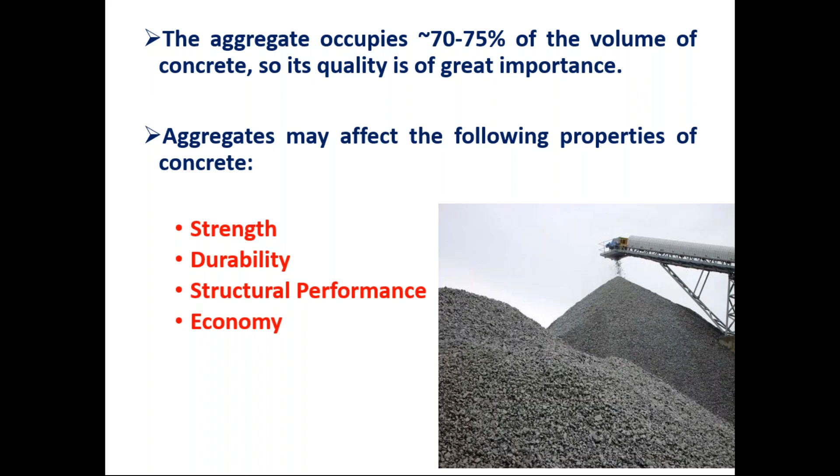So as I was discussing, the aggregates affect various properties of concrete including strength of the concrete, durability of the concrete, and its structural performance and economy, because ultimately the aggregate decides the economy of the concrete mix. Of course, one important thing I'm going to discuss is also the workability of the concrete - workability in the fresh stage and all other things in the hardened stage.

Aggregates have three main functions in concrete: to provide mass particles which are suitable to resist the action of applied loads and show better durability than the cement paste alone; to provide a relatively cheap filler for the cement material; and to reduce volume changes resulting from the setting and hardening process and for moisture changes during drying.

The last one is equally important because the cement paste undergoes considerable shrinkage. If you add aggregates to the cement paste, it helps in reducing the volume changes which happen from the setting and hardening process. The moisture changes during drying also result in shrinkage, and aggregates are very good in preventing shrinkage. So aggregates have all these important functions to perform in concrete.

The properties of concrete are affected by the properties of aggregates. That means we need to understand the properties of aggregates very well - we need to test the aggregates before we use them in concrete. The mineral character of aggregate affects the strength, durability, and elasticity of concrete - how strong the aggregate is. The mineralogy, the mineral composition, helps the aggregate in the concrete achieve the required strength.

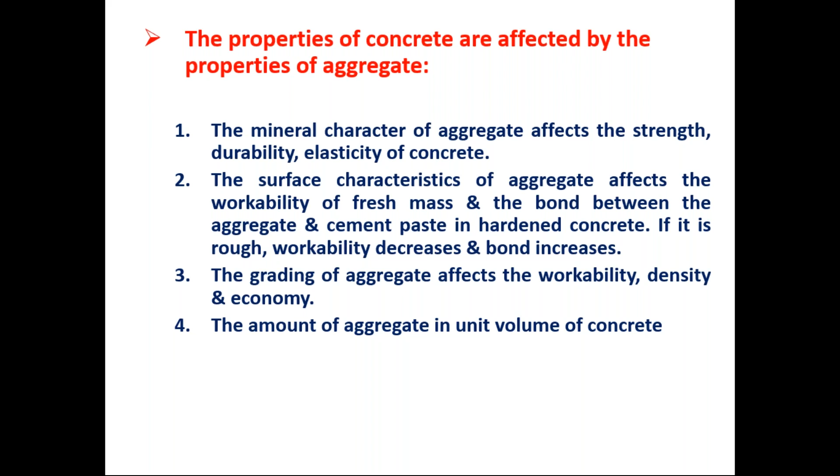Then the grading of aggregates affects the workability, density, and economy. This is the most important aspect of aggregates - the gradation. We need to check the gradation of aggregates whenever we want to propose aggregate from a particular source. The amount of aggregate in the volume of concrete also matters - how much aggregate is present in one unit or 1 cubic meter of concrete. So all these four factors affect the properties of concrete in a big way.

However, all aggregates are not inert. We normally assume aggregates are inert materials, but some aggregates exhibit physical action such as swelling and shrinkage, seen in lightweight aggregates and similar materials. Chemical action is another important factor, since some reactive silica present in aggregates reacts with alkalis in cement, causing alkali-silica reaction. So physical action, chemical action, and thermal action are three important properties to understand, since some aggregates are expansive or show contraction, though not normal aggregates.

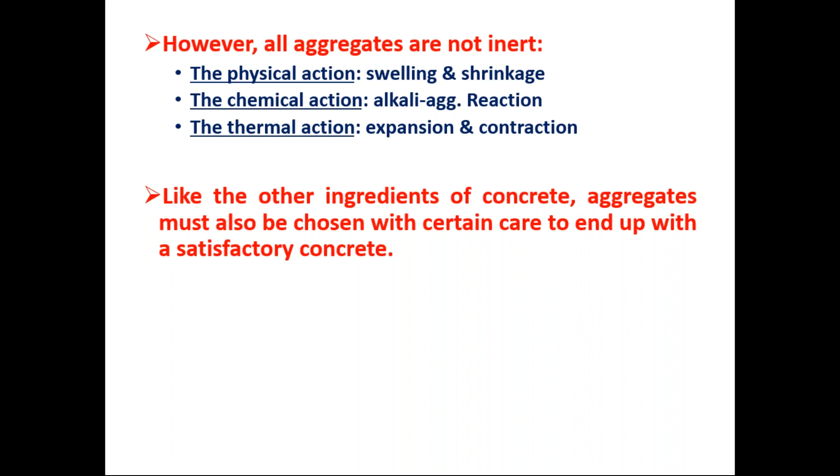Like other ingredients of concrete, aggregates must be chosen with care to produce satisfactory concrete. So let us look into various classification methods for aggregates.

According to source, aggregates can be classified as natural or artificial. Natural aggregates may be deposits with no change in their natural state other than washing, crushing, and grading - they remain the same naturally available material. This can be sand, gravel, or crushed stone from stone crushers.

Artificial aggregates are obtained either as a byproduct or by a special manufacturing process such as heating. Classic examples are blast furnace slag, which can be used as both fine and coarse aggregate, and expanded perlite, which comes as a byproduct from heating.

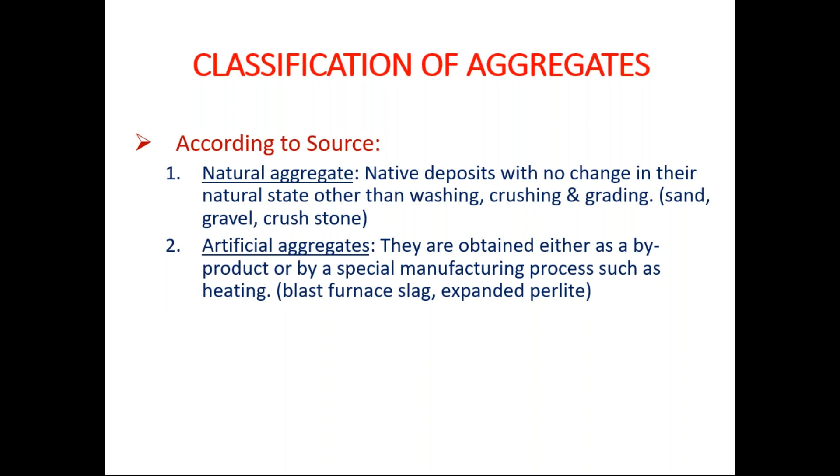Another classification is petrological classification. According to origin, aggregates may be of igneous rock origin, sedimentary rock origin, or metamorphic rock origin. This classification is equally important.

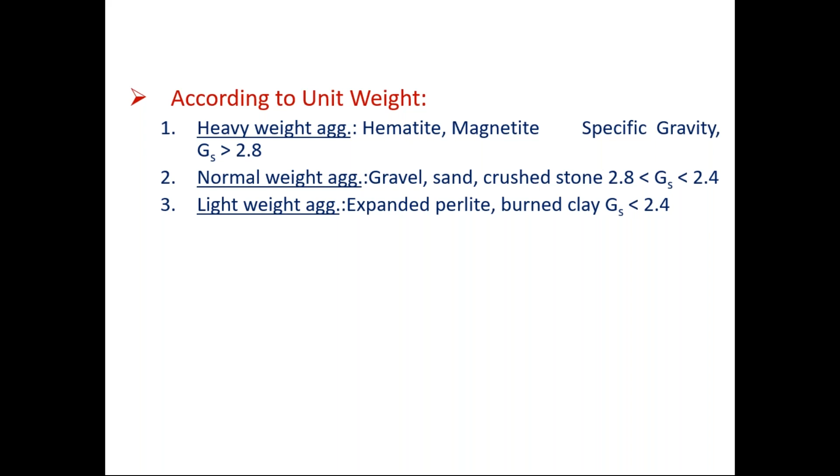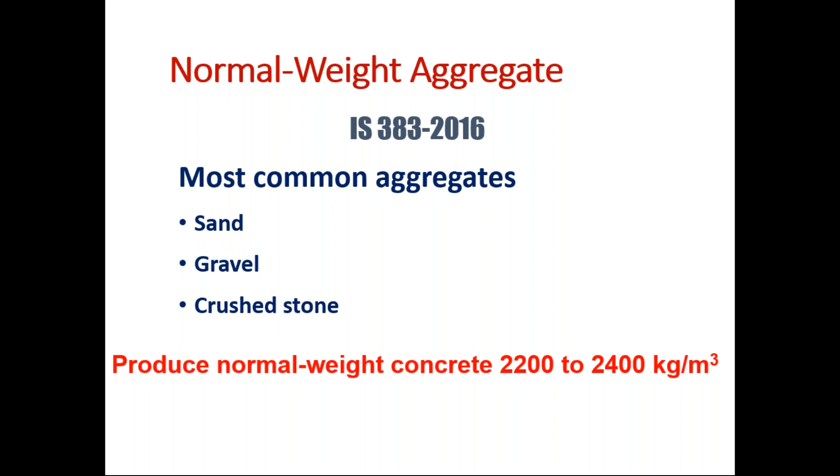Then there is classification by weight. Some aggregates are lightweight, some are normal weight, some are heavy weight. Hematite typically has specific gravity more than 2.8, up to 4 or so. Normal aggregates have specific gravity between 2.4 and 2.8. Lightweight aggregates normally have specific gravity less than 2.4. IS 383, revised in 2016-2017, covers most common normal weight aggregates, whether natural sand, gravel, or crushed stone. To produce normal weight concrete, density is about 2,200 to 2,400 kg per cubic meter.

For fine aggregate, we would all like to use natural river sand, which is very clean, especially from river beds. But natural river sand availability is decreasing, so we are resorting to what is called crushed stone sand. Fine aggregates typically constitute about 35% by volume, and particles less than 5mm in size are called fine aggregates.

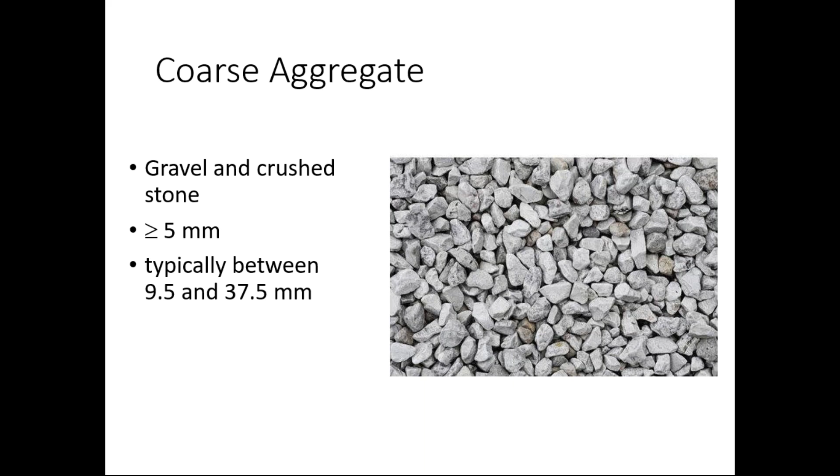Coarse aggregates include gravel and crushed stone greater than 5mm, typically between 9.5mm to 37.5mm. These are normally used in two sizes: one is 20mm, another is 12.5mm. Coarse aggregates play a very important role.

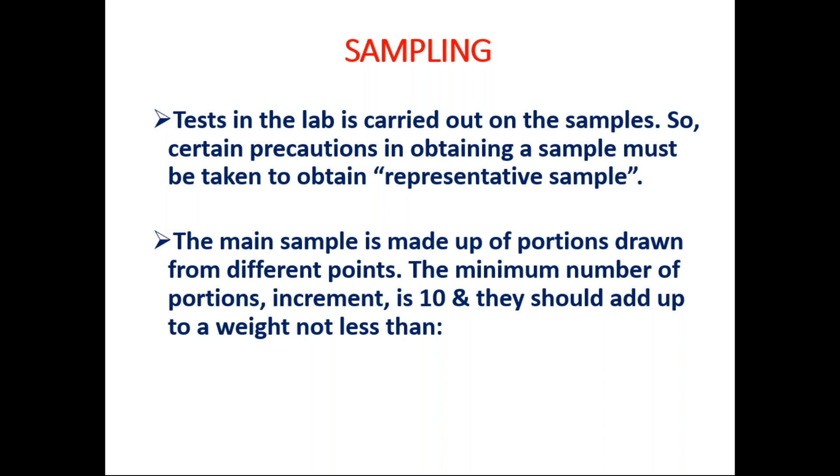Whenever you want to test aggregates, they must conform to various requirements of IS codes. Sampling plays a very important role - it should be a representative sample. Many times, aggregates available outside are of very good quality, but sampling is done poorly, so laboratory results may indicate the sample doesn't conform to requirements. The main sample is made up of portions drawn from different points, with a minimum of 10 portions, adding up to specified weights - greater than 25mm about 50kg, 25 to 5mm about 25kg, and less than 5mm about 13kg.

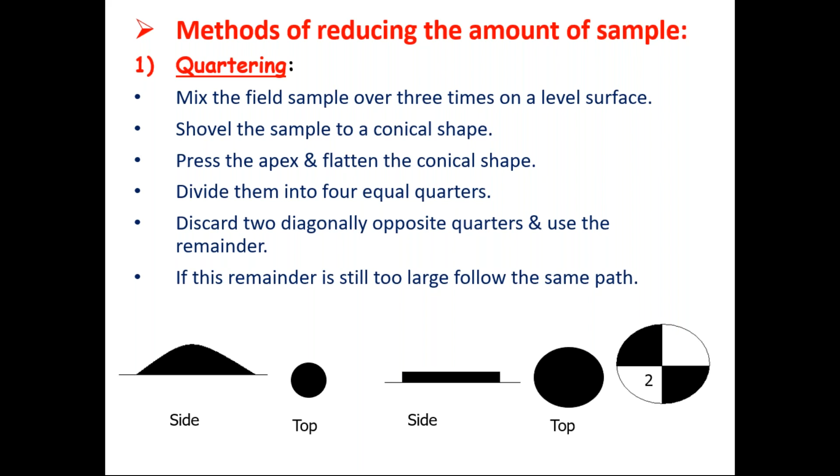You need to select the aggregate and sample it properly before sending to the laboratory. Another way of sampling for the laboratory is the quartering method. Mix the field sample over 3 times on the level surface, shape the sample into a conical shape, press and flatten the conical shape, divide it into 4 equal patches, discard the 2 diagonally opposite portions and use the remainder. If this remainder is too large, follow the same process once again. This is how sampling of aggregate is done.

Then, what we need to understand with respect to aggregate is its shape and surface texture. This is basically the classic example of origin of aggregate - what it is made up of, what type of rock characteristics are there, and particle size.

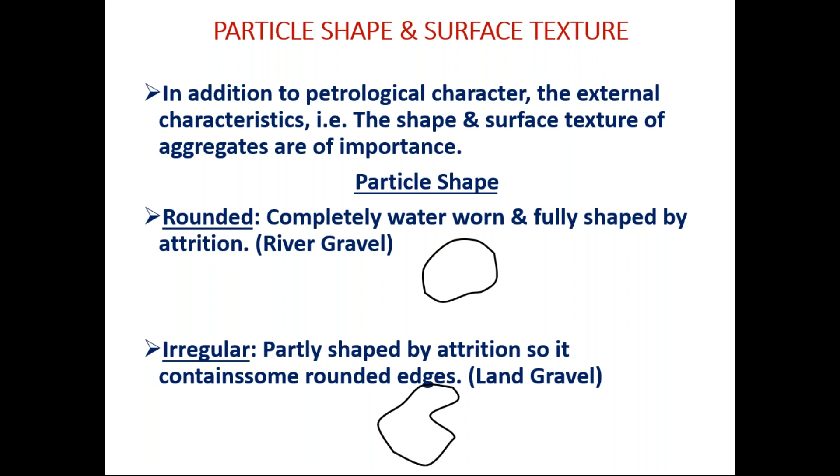Particle shape: rounded shape is completely waterworn or fully shaped by attrition, that is river gravel aggregate. Normally that's why we get river sand, the most popular one. Irregular shape is partly shaped by attrition, so it contains some rounded edges. You can see the typical examples of flat and elongated, angular, and round aggregates of natural origin.

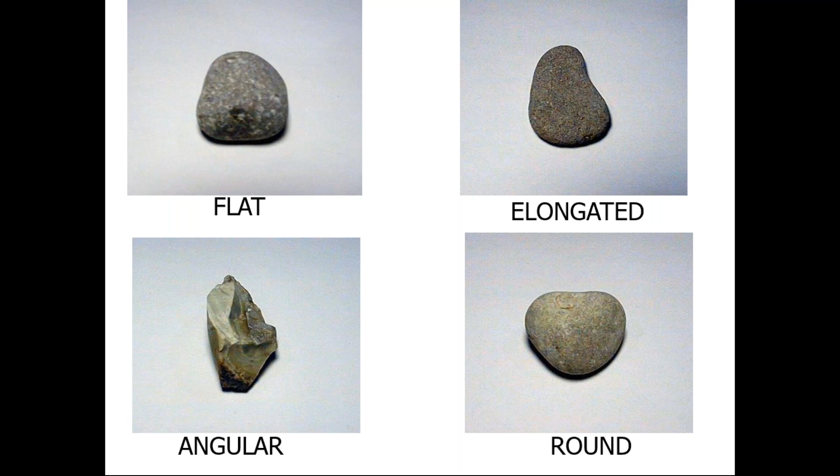Rounded aggregates are suitable for use in concrete because flaky and elongated particles reduce workability, increase water demand, and reduce strength. In the case of angular particles, the bond between aggregate particles improves due to interlocking, but due to higher surface area, angular particles increase water demand and therefore reduce workability. As a result, for the same cement content and same workability, rounded aggregates give higher strength. This is the difference between rounded aggregate and angular aggregate.

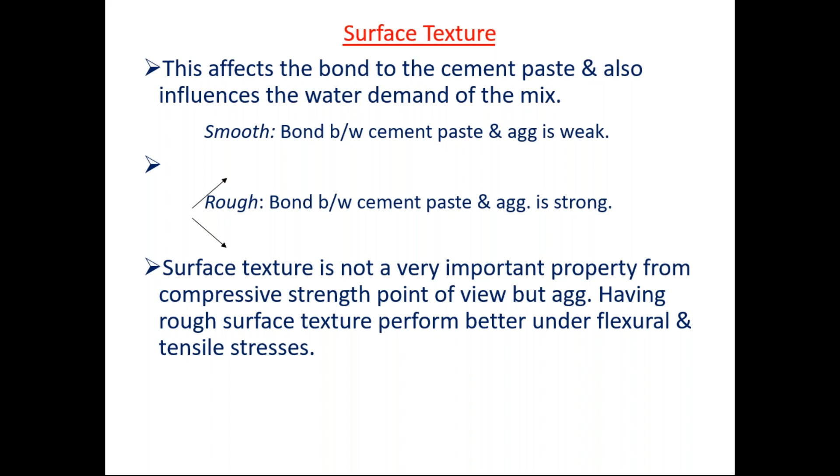The next most important aspect of aggregate is the particle size distribution of an aggregate sample - this is gradation, which we call grading of aggregates, found from sieve analysis. Strength development of concrete depends on degree of compaction, workability, together with many other factors.

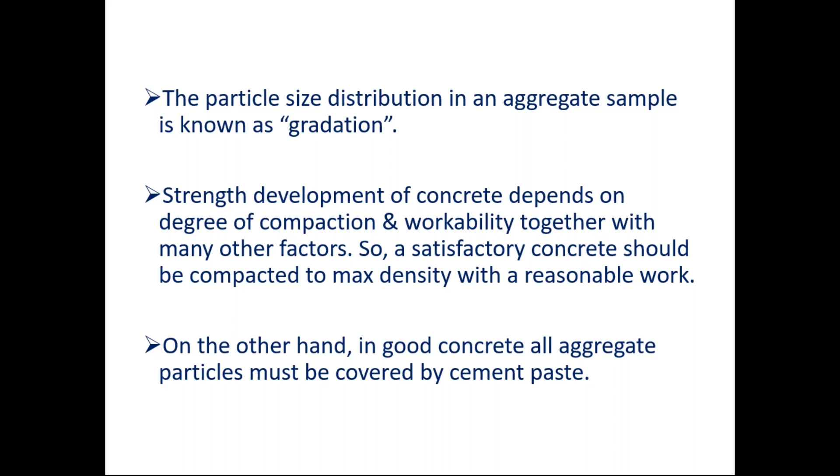The satisfactory concrete should be compacted to maximum density with reasonable work or reasonable energy. On the other hand, for the concrete, all aggregate particles must be covered by cement paste - this is the essence of compaction. The grading of aggregate must be such that the workability, density, and volume stability of concrete are not adversely affected by it.

If you use more and more fine particles in a concrete mix, the cost becomes very high because in order to coat each and every particle, the cement requirement increases. As the aggregate size increases, meaning you use more coarse particles, cement consumption reduces, but at the cost of loss of workability. So fine particles result in higher cost, whereas coarse particles result in loss of workability.

A reasonable combination of fine and coarse aggregate must be used - this is what mix design or mix proportioning is all about. First, we need to have good granular aggregates. Then we can combine both fine and coarse aggregates in a proper way, in a suitable proportion, so that we will be able to achieve the mix design or the target properties we are aiming at.

This can be expressed by the maximum density or minimum voids concept - this is a very popular concept. We have to proportion the coarse and fine aggregates in such a way that we achieve maximum density with minimum voids.

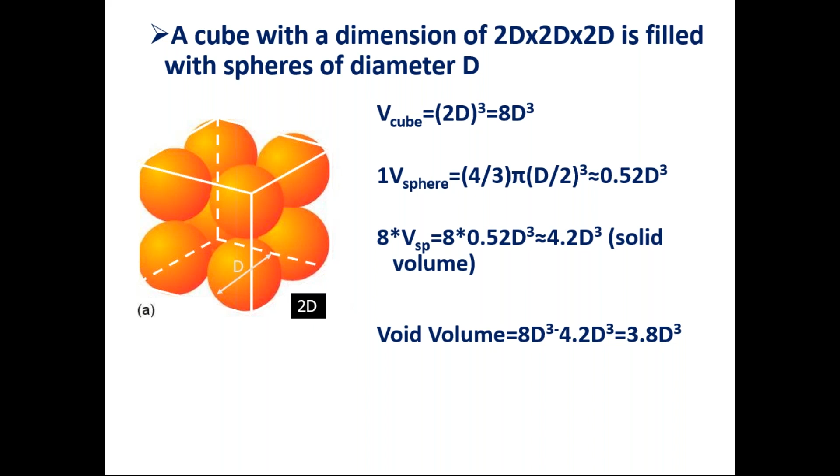Irrespective of the size of the cube, if the same cube is filled with spheres of diameter d by 4, we'll have nearly about so many spheres, the number of spheres, but the solid volume will be the same. That means the size of the aggregate is not important. If an aggregate with the same size is used, the amount of void volume will not change.

So, to overcome this, different sizes of particles should be used.

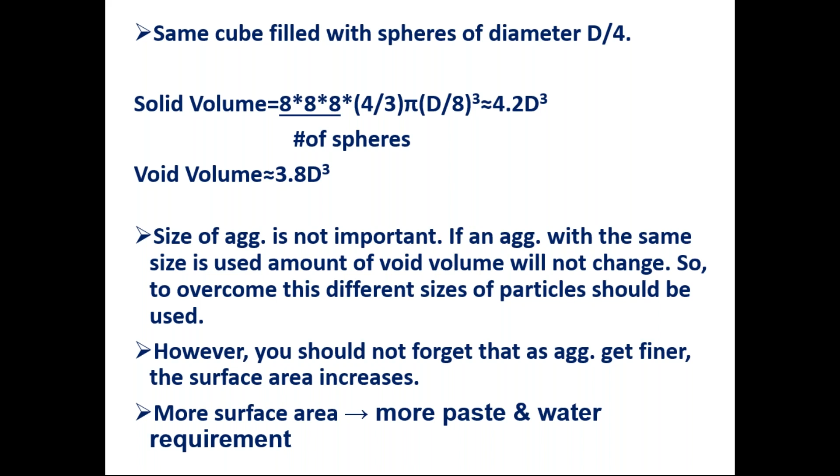However, we should not forget that as aggregate gets finer, the surface area increases, so we cannot use too many fine aggregates. If fine particles increase, there will again be demand for cement, more surface area needing more paste and more water requirement. But at the same time, you cannot have bigger particles of the same size of aggregate either. So, the importance of gradation comes into picture.

It should be graded. Factors affecting the desired grading: surface area of aggregate. The lower the surface area, the lesser is the paste requirement.

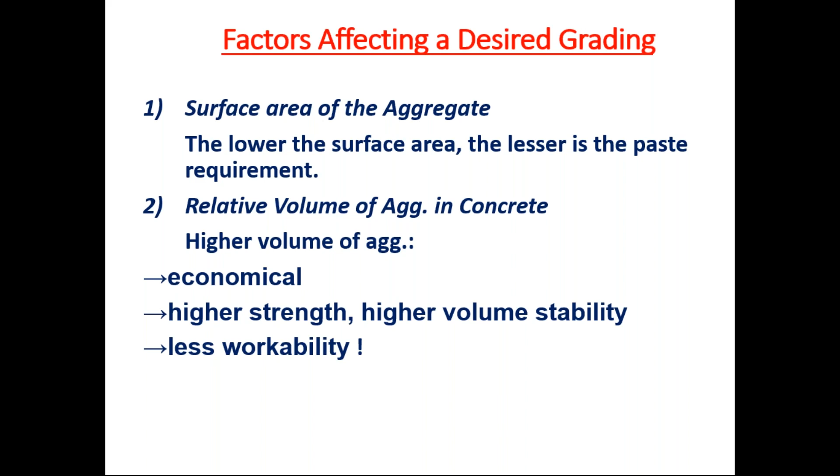Relative volume of aggregate in concrete: higher the volume of aggregate, the mix becomes more economical, the strength will be higher, and higher volume stability, as mentioned earlier, the shrinkage will be less, but with less workability. Of course, when you get the advantage of economy as well as higher strength, workability suffers. But we can take care of workability by using suitable chemical admixtures.

Now, what is workability? The ease with which a concrete mixture can be mixed, transported, placed in the form and compacted without any segregation. Workability increases as the amount of paste, the fine aggregate and coarse aggregate increases. It also increases as the amount of mortar between the coarse aggregate particles increases.

Segregation is the separation of particles with different sizes and specific gravities. The requirements of workability and absence of segregation tend to oppose each other; thus these two factors are interrelated. The nature of this is workability, which in turn affects most of the properties of concrete. So, workability and segregation need to be addressed as far as coarse aggregate is concerned.

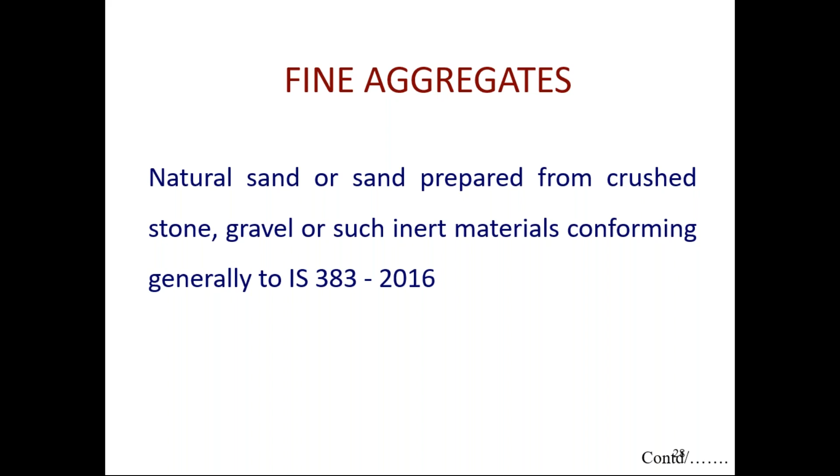We are going to discuss both fine and coarse aggregate from the parameters point of view. Which are the parameters we look at for fine aggregates as well as coarse aggregate? Natural sand, naturally prepared coarse aggregate sand, crushed sand, gravel, or such materials conforming to IS 383-2016 shall be used. Which are the tests we conduct in the laboratory on the fine aggregates?

So these are the tests: one is sieve analysis, second one is specific gravity, and what is bulk density?

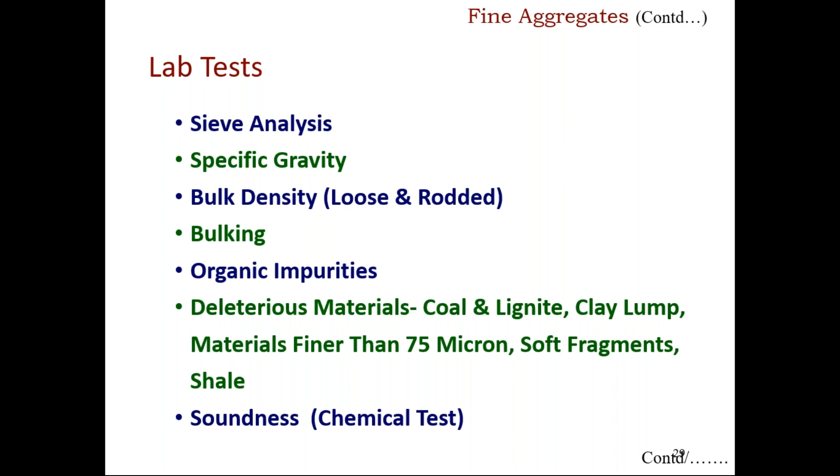Then organic impurities in fine aggregates should be verified, as it will reduce the strength of the concrete. We have a list of deleterious materials starting from coal and lignite, clay lumps, materials finer than 75 micron, soft fragments, shale, and soundness tests, chemical tests. So these are the tests which you conduct on the fine aggregates.

Percentage passing through 600 micron is a critical parameter. From a close look at the grading limits of fine aggregates, it can be seen that zone 1 is the coarsest and zone 4 is the finest. Zone 2 and zone 3 are the moderate zones, so we prefer to have a fine aggregate in the concrete conform to zone 2 or zone 3. Zone 1 can be used, only thing is it is coarse in nature, so we need to increase the percentage of sand when we want to use zone 1 sand.

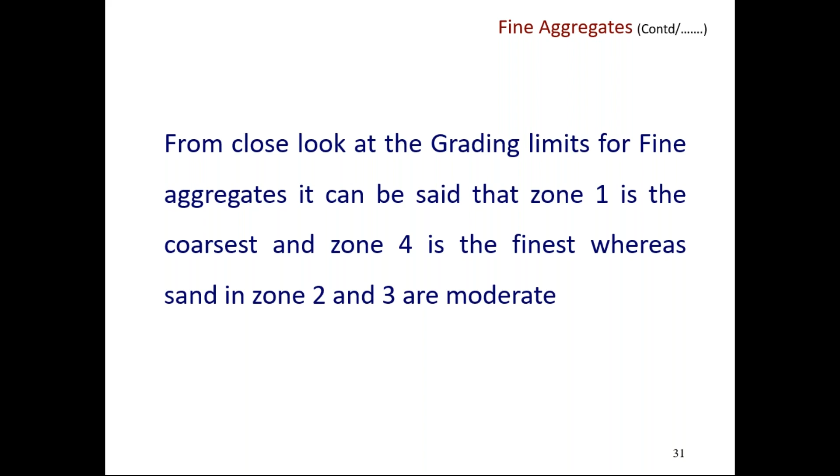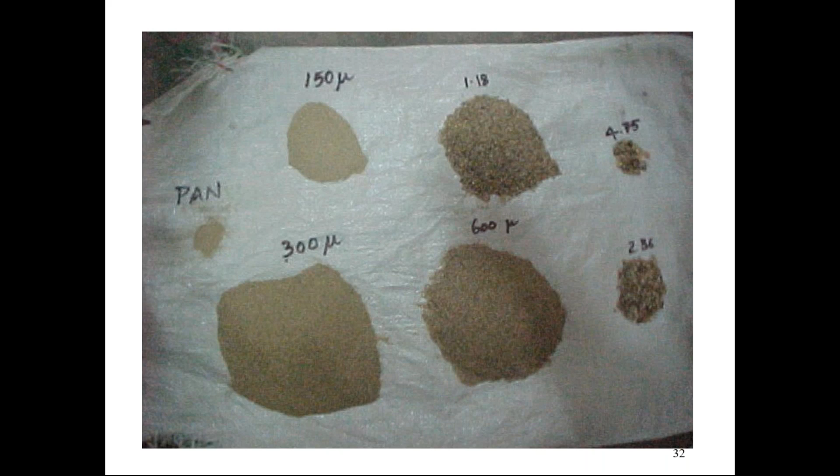So these are the few fractions of sieve sizes: 4.75, 2.36, 600, 300, 150 microns, and so on.

In addition to this gradation analysis, we also look at materials finer than 75 micron, called silt content if it's natural river sand, or particles finer than 75 micron if it's manufactured stone sand. The method we adopt for finding the silt content is the washing method. We cannot use the dry sieving method, because the particles get adhered to the sieves, and then we won't get the correct picture of particles passing finer than 75 micron. So this test is very important, whether it is natural river sand or manufactured stone sand.

In manufactured stone sand, there will normally be more fines passing through 75 micron. We need to control these fines, as these values may go up to even 20%. If you look at this table, the limits are about 3% and 15% - maximum of 3% for natural river sand, and a higher maximum for manufactured stone sand.

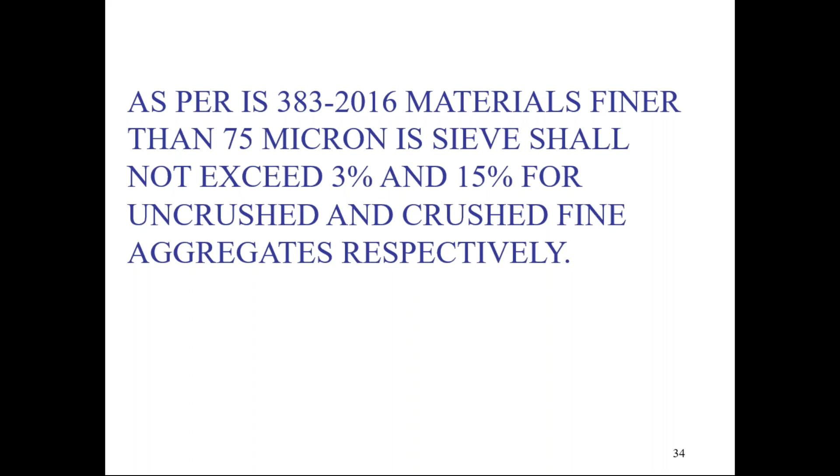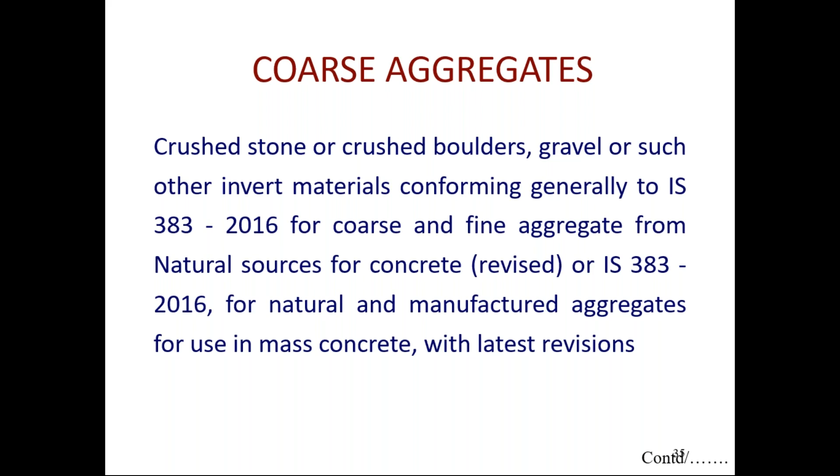Now, after understanding these requirements of fine aggregate which affect the properties of concrete, let us look into coarse aggregates. Coarse aggregates are also tested for properties like specific gravity, bulk density, loose and rodded bulk density, water absorption, flakiness index, elongation index, aggregate impact value, abrasion resistance, crushing value, alkali aggregate reactivity, and soundness.

Of all these, the first four are important from the building construction point of view, and the remaining are equally important. Normally in road construction, we look at aggregate impact value, abrasion resistance, and aggregate crushing value - these are the important tests from the road construction point of view.

Of course, alkali aggregate reactivity is something you need to verify before accepting the aggregate sample from a particular source, because some aggregates may have reactivity - the silica present in aggregate may react with alkalis present in cement.

Specific gravity is the most important parameter as far as both aggregates are concerned. Specific gravity is the ratio of the weight of a unit volume of the material to the weight of the same volume of water at 20 to 25 degrees Celsius.

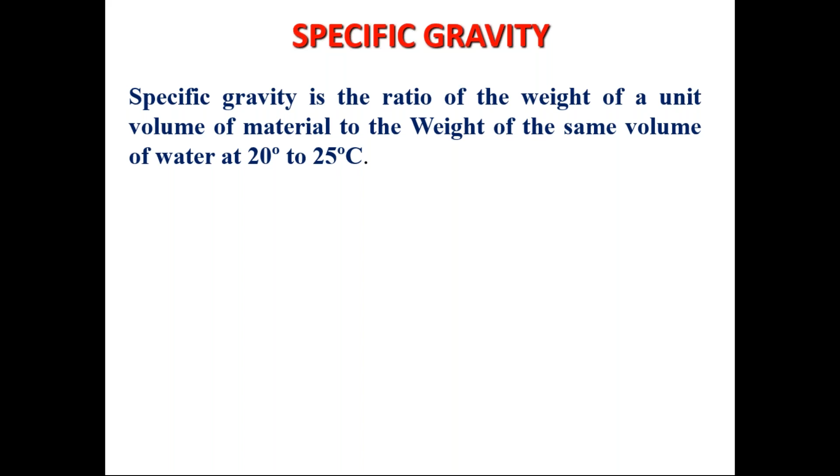So you can determine this from the weight of the aggregate and the weight of an equal volume of water. Specific gravity is specifically used in mix design to find out the material weight - if you fix the weight, you can find out the volume. That is for conversion purposes, and also for proportioning concrete mixes using the absolute volume method with measures of specific gravity.

Also, specific gravity is not a measure of quality of aggregate, but we can say higher the specific gravity, better is the aggregate, because normally our granite aggregate has a specific gravity of about 2.6 or so, whereas hematite and other aggregates have specific gravity of still higher values.

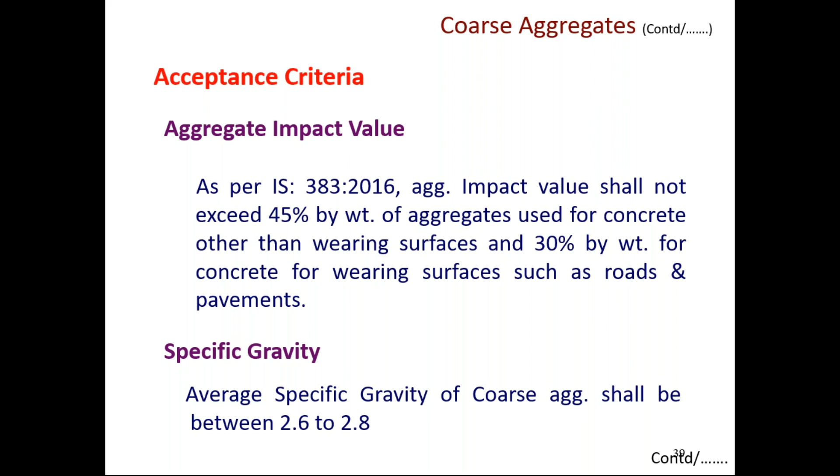Coming to acceptance criteria given in various IS codes for aggregate impact value, as I told you, these are important from the wearing surfaces or road construction surface point of view: 45% for normal construction, and should not be greater than 30% for wearing surfaces. Specific gravity values are going to be around 2.6 to 2.8.

Water absorption is another important property of both coarse and fine aggregates. For coarse aggregate, water absorption normally starts from a very low value of 0.2, 0.3, about 0.5% to 1%, and for fine aggregates, it will be up to 2%.

This plays a very important role while proportioning the concrete mixes, while determining the water addition to the concrete.

Flakiness and elongation index again indicate the shape of the aggregate. The combined flakiness and elongation index shall not be more than 30%.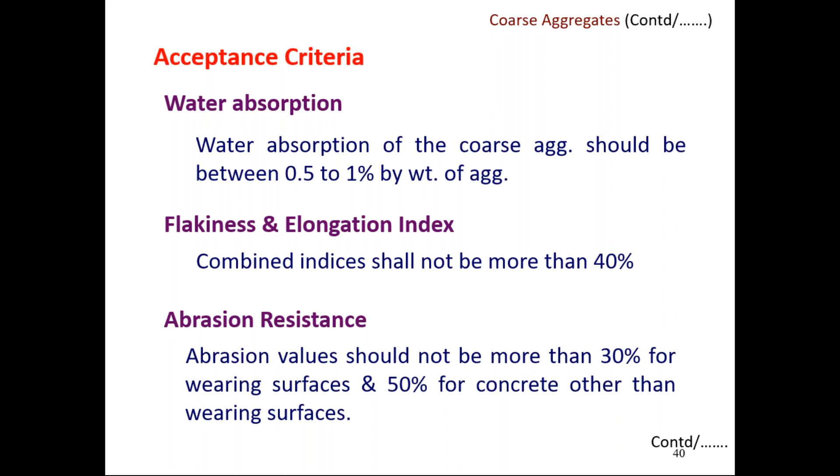Abrasion resistance is another test which we do using the Los Angeles abrasion testing machine, with limits of 30% for road construction purposes and not greater than 50% for surfaces other than roads.

Crushing value is another important test, which should not be more than 30% for wearing surfaces. If the crushing value increases beyond 30%, the aggregate can still be used in concrete other than wearing surfaces. In case the aggregate crushing value exceeds 30%, the test for 10% fines has to be done, and the minimum load for the 10% fines should be 50 kN.

So this is how we can accept the coarse aggregate if it is not conforming to the crushing value test.

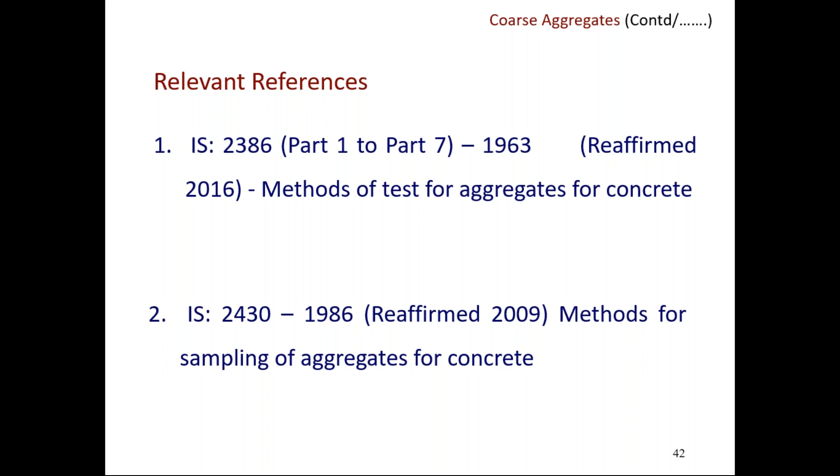IS 2386, various parts, gives the method of test, how to carry out the test as per the standards, what equipments are required, and how to sample the aggregates. IS 2430 gives the procedure for sampling, and IS 2386 parts 1 to 7 give the procedure for carrying out the tests.

Determination of grading of the aggregate is done by two different methods: one is fineness modulus, another is granulometry or sieve analysis. The grading of particles of an aggregate sample is performed by sieve analysis, conducted using standard test sieves. Test sieves have square openings, and their designations correspond to the size of these openings.

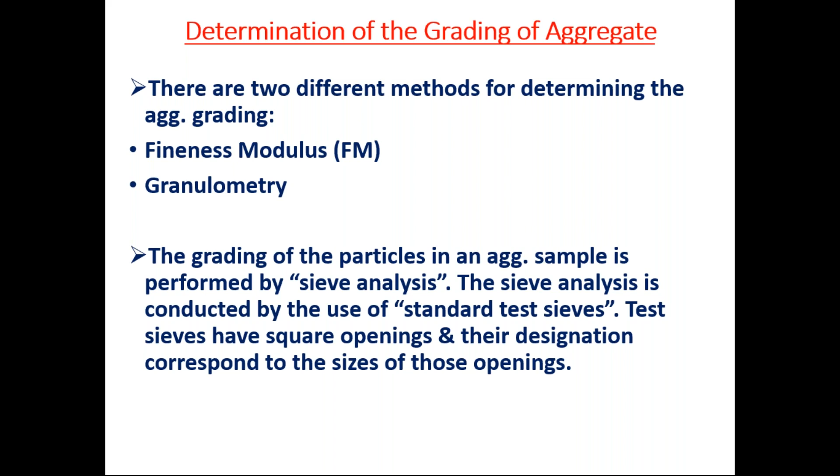Fineness modulus is determined from sieve analysis only. It is the cumulative sum of the percentage retained on each sieve, divided by 100. For fine aggregate, the practical limits of fineness modulus are between 2 to 3.5, and for coarse aggregates it may be from 5.5 to 8.

Fineness modulus is not always representative of the gradation of an aggregate sample, and various gradation curves may give the same fineness modulus. So fineness modulus might sometimes be misleading, and you should be careful while using it for practical purposes.

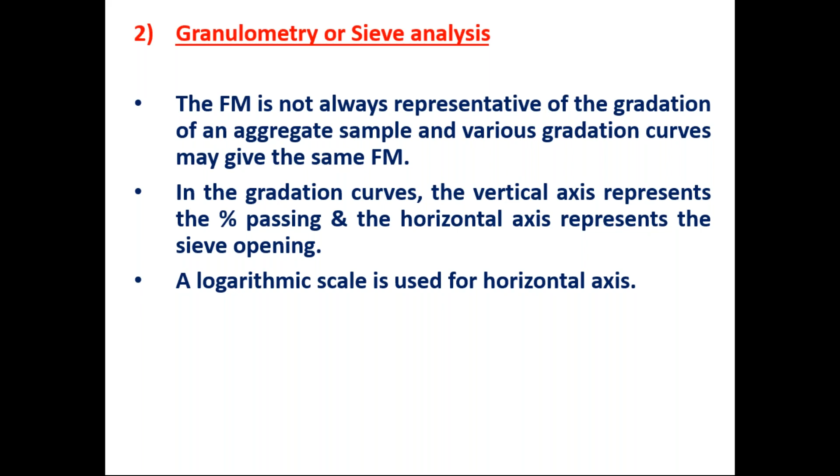In the gradation curves, the vertical axis represents the percentage passing, and the horizontal axis represents the sieve opening. These are the sieve fractions on 20 mm, 12.5 mm, 10 mm, and 4.75 mm. For coarse aggregate, for various maximum sizes of aggregate - 40 mm, 20 mm, and 12.5 mm - the percentage passing ranges have been given for each sieve size: 40 mm, 20 mm, 12.5, 10, and 4.75.

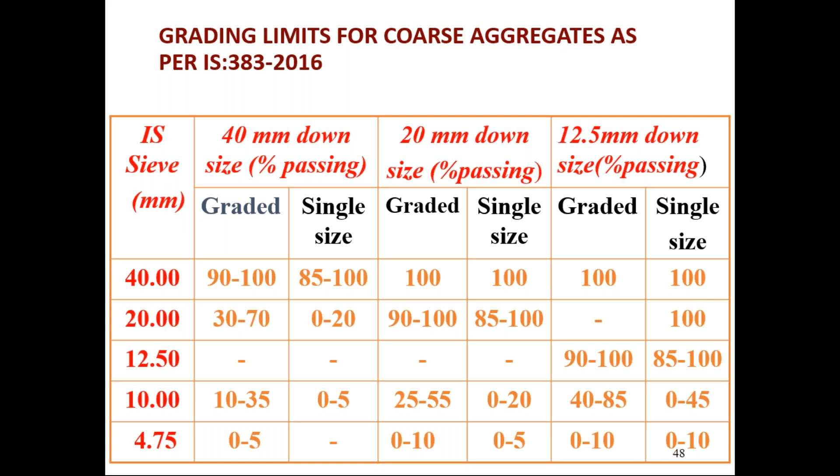These requirements are very important, and we have to ensure they are met. Normally, 20 mm aggregates conform to single size requirements, while 12.5 mm aggregates conform to graded requirements. We need to blend 20 mm and 12.5 mm aggregates in suitable proportions to get graded 20 mm size aggregate. So blending is always necessary to get good gradation; otherwise it becomes single size aggregate.

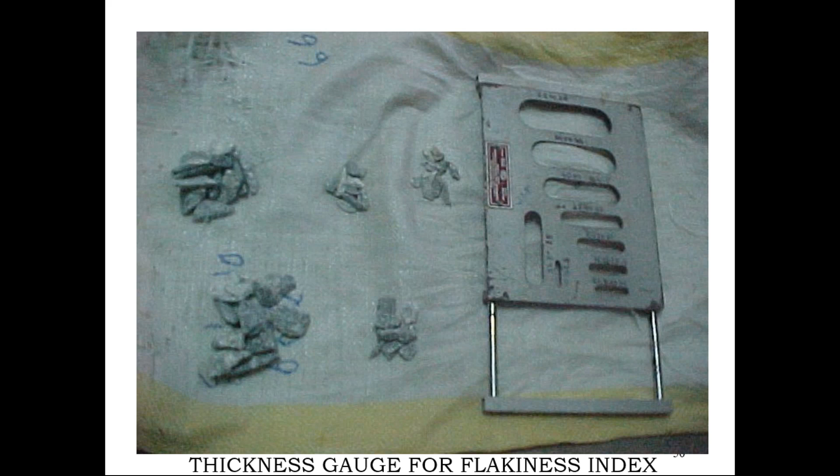Thickness gauge is used to measure the flakiness index of the coarse aggregates. This test is very important and must be carried out as per the procedure given in the standard. Length gauge is used for the elongation index.

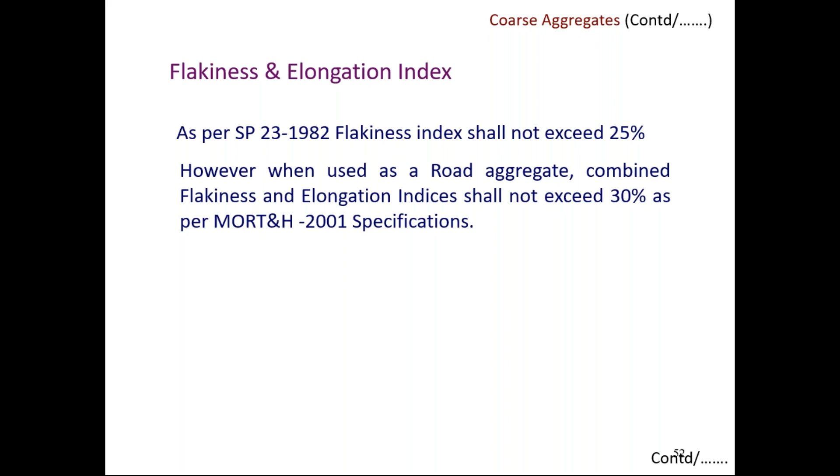Combined flakiness and elongation indices shall not be more than 30%. Earlier it was 25%, now it has increased to 30%, and nowadays IS 383 allows up to 40%. The Los Angeles abrasion testing machine is normally used to find the Los Angeles abrasion value.

Now coming to the moisture condition of the aggregates. Four moisture conditions can be seen: oven dry, air dry, saturated surface dry, and wet condition. Each condition has to be ascertained properly in order to find out the water requirement for the coarse aggregates while mixing the concrete.

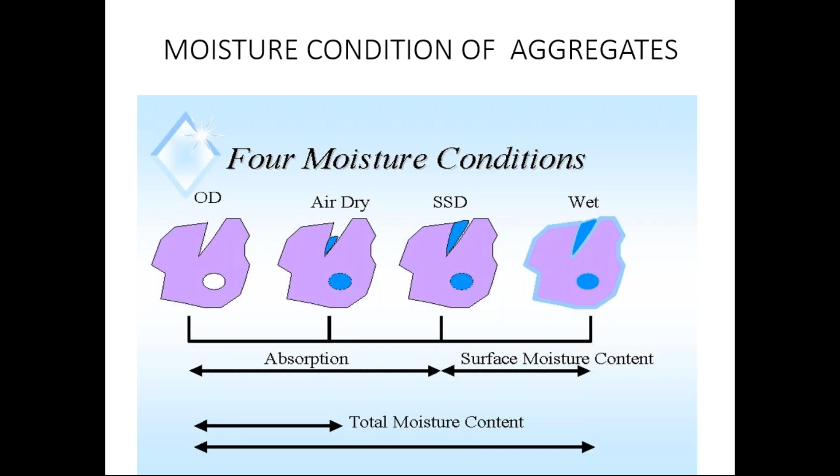Bulk density is the weight of aggregate that fills a unit volume, and this unit weight depends on its size distribution, the shape of the particles, and the compaction method used. So based on these three important characteristics of aggregate - gradation, shape, and compaction effort - the type of effort applied, whether loose compaction, heavy compaction, or rodded compaction, matters.

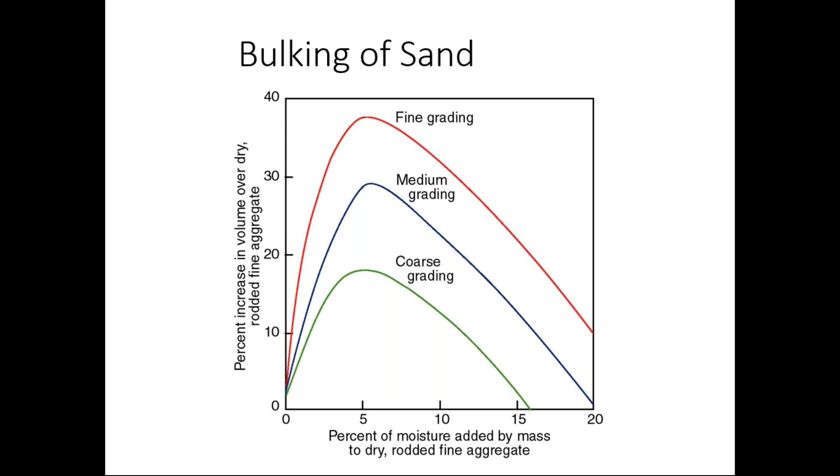Another important aspect of fine aggregate is bulking of sand. Some sand, when it comes in contact with moisture, the volume increases. Thereby, the apparent volume will be more, whereas the actual volume and actual weight will be less. We need to make correction for moisture content as well as volume correction when using the volume method. Otherwise, for the weighing method, we have to estimate the moisture present in the sand so that we can reduce the water content to be added to the mix.

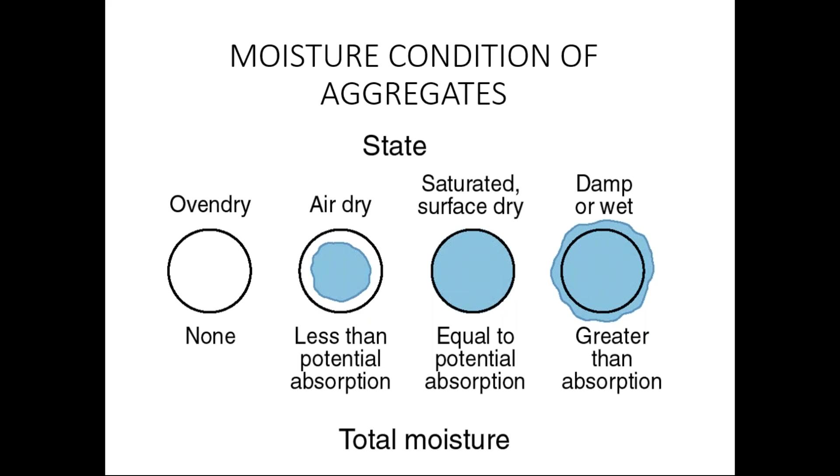Moisture condition of aggregates can be oven dry, air dry, saturated surface dry (SSD), and damp wet. So the total moisture we need to calculate taking into account all these things.

Alkali aggregate reactivity, as I told you, is a reaction between the active mineral constituents of some aggregates, and the sodium and potassium alkali hydroxides and calcium hydroxide in the concrete. There are two types of alkali aggregate reaction: one is alkali silica reaction, called ASR, and the other is alkali carbonate reaction. In case of limestone, the carbonate reaction takes place, called ACR.

We need to really look into this depending upon the source of the aggregate, and do all these tests. Alkali carbonate reaction happens only if the aggregate is of limestone origin, whereas alkali silica reaction can be present in normal aggregate also. We need to check these things.

There are two or three methods for finding out alkali aggregate reactivity. One is the chemical method, another is the mortar bar method, done in the laboratory. The chemical method gives an indication of the presence of reactive silica in the aggregate, whereas the mortar bar method is a physical method where you can find out the expansion if it happens, which is not good for the concrete.

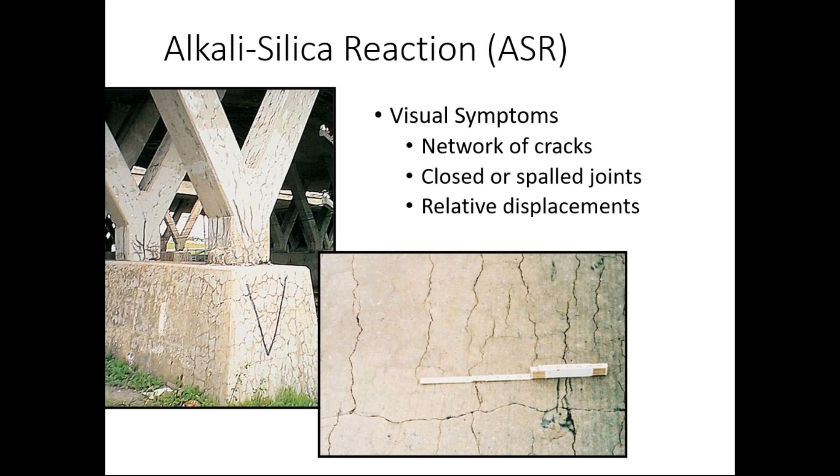These are pictures showing where alkali silica reaction is taking place - the typical cracks and how they develop. Visual symptoms include a network of cracks, closed or spalled joints, and relative displacements can also take place. This happens over a period of time and needs certain conditions to occur - the alkali hydroxide reactive silica gel reaction product. This is how ASR can take place.

What are the influencing factors? Reactive forms of silica present in the aggregate, which will come to know only through petrography examination. High alkali pore solution is also responsible, and sufficient moisture must be present - then only alkali silica reaction can take place. If one of these conditions is absent, ASR will not occur.

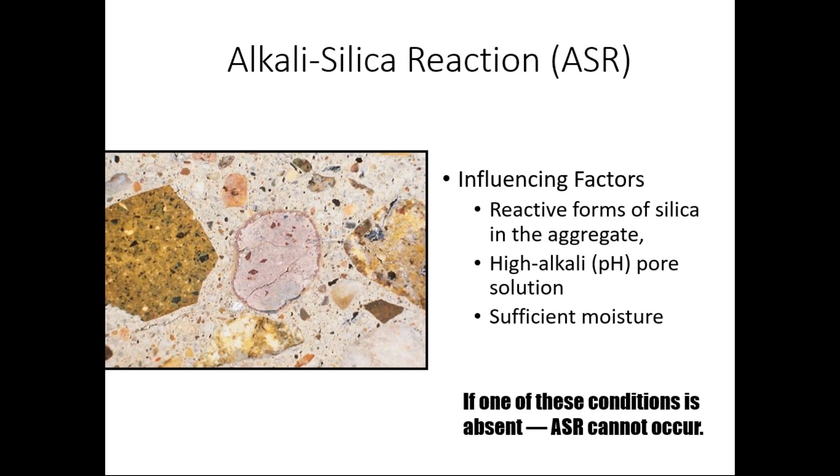So all three things are needed. One is high alkali pore solution - how will it come? It may come through cement also. So cement containing alkalis and aggregate containing reactive silica, and the third one is sufficient moisture. In the presence of these three, only alkali silica reaction can take place.

IS 383 gives an elaborate procedure for alkali silica reaction and mortar bar methods. The mortar bar method is also given in 383 as well as in ASTM standards. Chemical method is also given in ASTM as well as in IS 383. Petrographic examination is really important to know the mineralogical composition of the aggregate, whether it contains any reactive silica or clay particles in the coarse aggregates. Then by accelerated method, by rapid mortar bar method, we can also find the alkali silica reaction.

Concrete prism test is important because all other tests are done on mortar samples, whereas the concrete prism test is done using the concrete sample, so it will be more realistic and more useful to find out the alkali silica reaction.

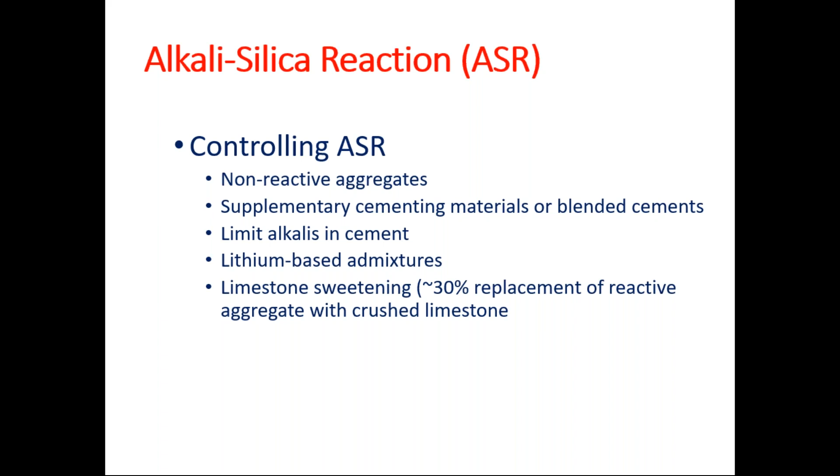How to control alkali silica reaction? Use non-reactive aggregates, adopt supplementary cementing materials or blended cements, and limit alkalis in cement. Lithium-based admixtures can be used. Limestone sweetening, that is 30% replacement of reactive aggregate with crushed limestone, is also a method. This is how we can control alkali silica reaction.

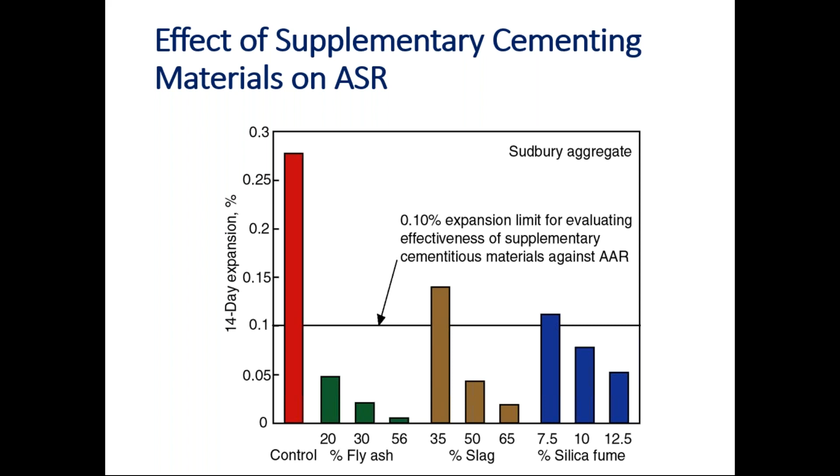These are some effects of supplementary cementing materials on ASR. You can really reduce it as you use fly ash, and this percentage of slag and silica fume. So the expansion goes below the broad line, where 0.1% is the expansion value. So when you use all these other things, you can see that the expansion reduces due to alkali silica reaction.

Now we talk about all these parameters and properties - they should be good. So how do you really get a good quality of aggregates? The production of aggregate is very important and critical. There are many types of processes. How do you produce the aggregate?

There are many types of crushers available, and these can be classified as jaw crushers, cone crushers, and vertical shaft impact crushers. These are the three types of crushers normally used to produce aggregates in the industry.

VSI aggregates are produced by the rock-on-rock principle. We need to study the effect of aggregates from VSI crushers. Fine aggregates from natural sources are becoming scarce and costly, with restrictions on quarrying from river beds, forcing construction industries to look for alternative sources. That's why manufactured sand has become popular due to the non-availability of river sand, and is one such alternative rapidly replacing river sand.

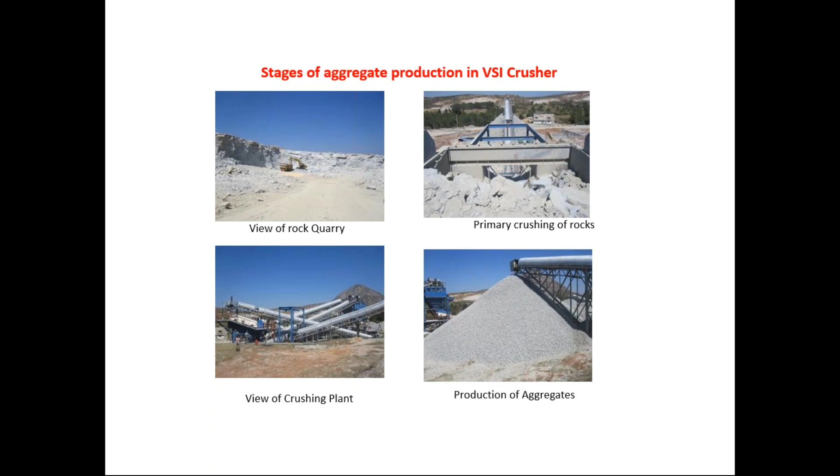We have a bulk rock quarry, where primary crushing of rocks is the first stage. Then we have a crushing plant for production of aggregates. So there are three core stages involving fraction separation and size separation.

These are the jaw-crushed aggregates, which you can see are flaky and elongated, whereas VSI-crushed aggregates are cubical in nature and have excellent properties in comparison. So we need to understand VSI crushing very well.

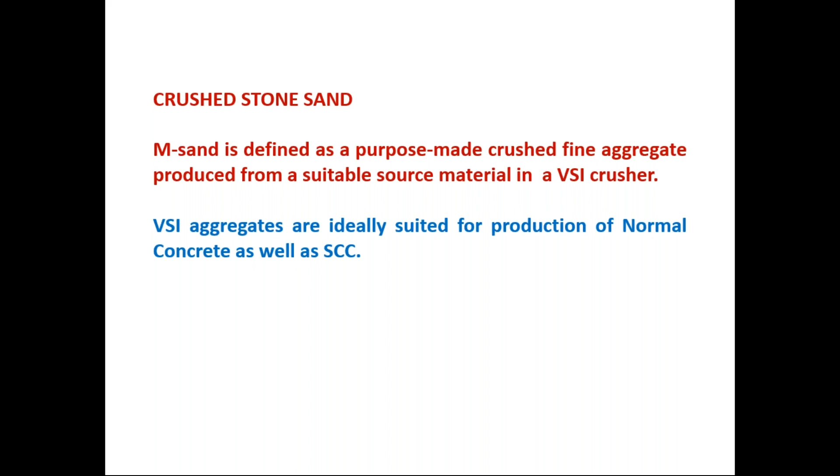Crushed stone sand is defined as a purpose-made crushed fine aggregate produced from suitable source material using a VSI crusher. VSI aggregates are ideally suited for production of normal concrete as well as self-compacting concrete.

Now, once we improve the quality of aggregate by this production method - the VSI aggregate method - we can really do the optimization of aggregates using packing density.

If we can select the aggregates in such a way that we get the highest packing density - what is the advantage of this highest packing density? Higher the packing density, lower will be the voids. Lower voids mean the cement paste required will be less, so we can achieve economy in cement.

At the same time, we cannot use a harsh mix based purely on packing density. You need slightly more paste than required by the packing density or optimal density method. So we optimize the aggregates by finding out the packing density, which is defined as bulk density divided by specific gravity.

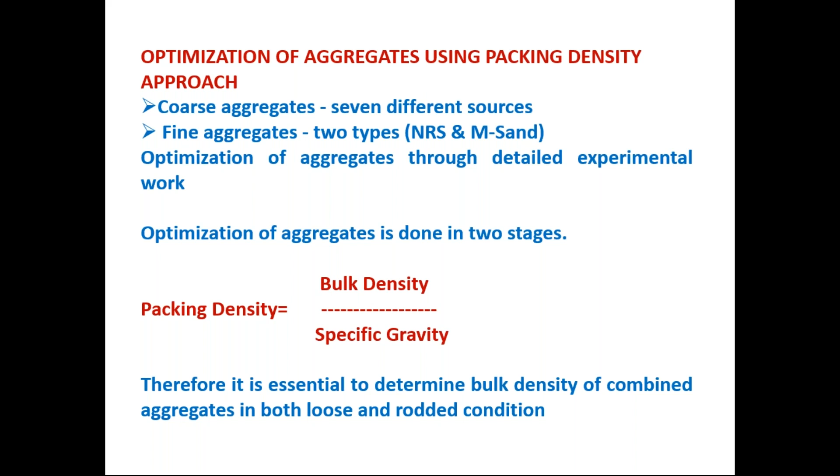Therefore it is essential to determine the bulk density of combined aggregates - not the bulk density of coarse aggregate and fine aggregate alone. We need to find this in both loose state and compacted condition, to really achieve a good packing density of aggregates.

For optimization of coarse aggregate of two sizes, first you have to combine and control them, because we don't get mixed aggregates - we always get single-size aggregate from the crusher. So we blend and optimize them through the bulk density method.

In the second stage, whatever you have optimized for coarse aggregate combination, go for optimization with the fine aggregate also - that is, the combined aggregate. There too you will find the loose and compacted bulk densities.

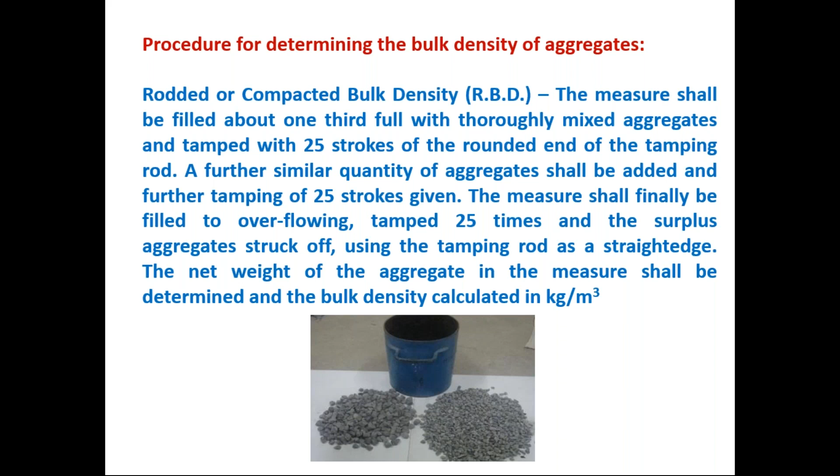We know the procedure well - bulk density can be measured with a cylinder of known volume. We tamp it with 25 strokes filled in 3 layers, and we get the required bulk density in both compacted and loose conditions.

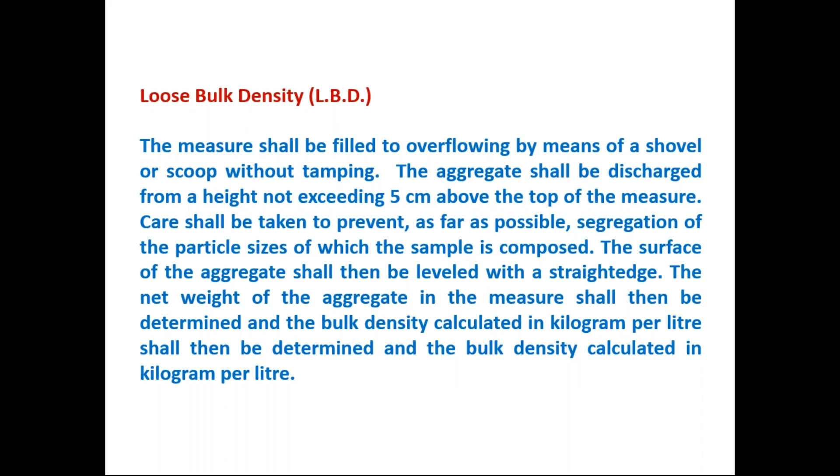For loose bulk density, the measure shall be filled by simply pouring it in, then measuring the weight and volume. Weight divided by volume will give the loose density.

Then for fine aggregates - again there are two types of fine aggregates. We can combine for packing density, measuring with river sand as well as with manufactured sand.

In this particular study, we studied three types of crushers, taking the fine aggregates from three different crushers, and the combined packing density was done for these three crushers, with requirements shown here.

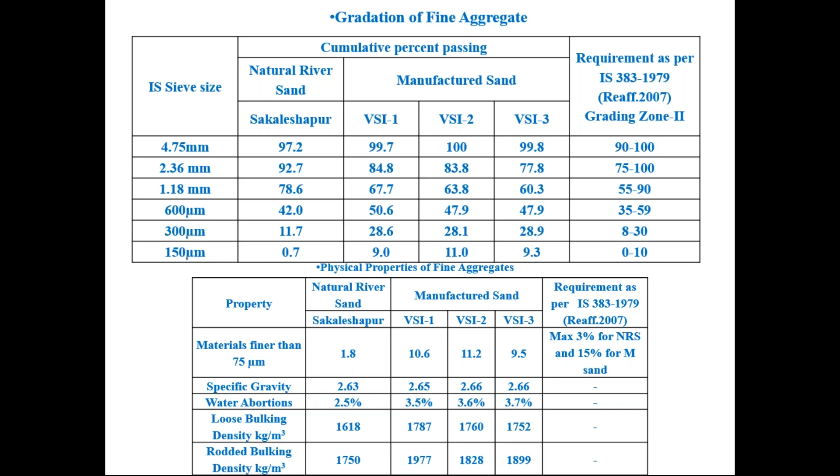Material finer than 75 microns was measured, along with water absorption, loose bulk density, and compacted bulk density - all these were measured. This is how the gradation looks for the natural river sand as well as the various sands obtained from the different crushers.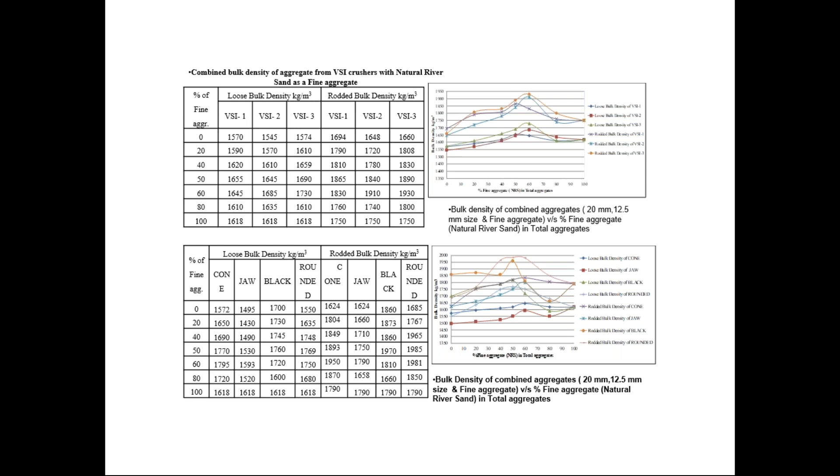So for coarse aggregate, we do combined gradations. We need to do the combined gradation of percentage passing. Finally, you mix natural river sand as fine aggregate with the coarse aggregates at various percentages of fine aggregate, 0%, 20%, and so on. Now we arrive at the graph of bulk density versus the percentage of fine aggregate added to the mix. This way you can determine the quantity of aggregates by using maximum bulk density.

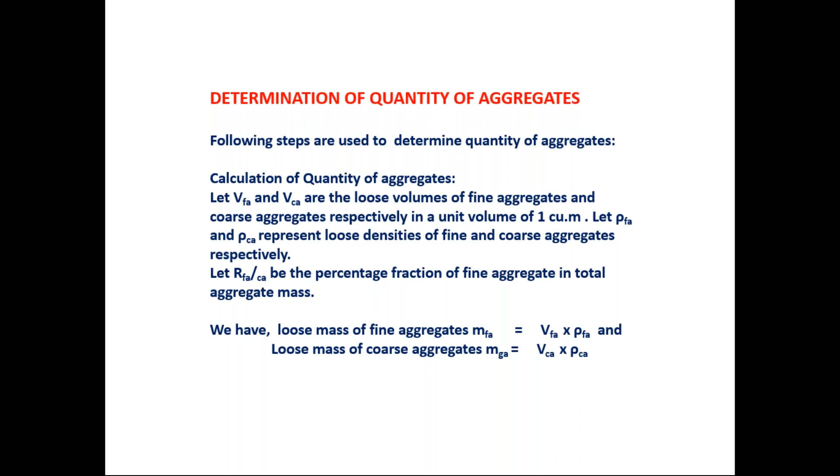Now what is packing density? We can find the packing density by determining the volume of each individual component. You can use this concept to find the packing density, and also find the aggregate packing factor by dividing the rodded bulk density by the loose bulk density.

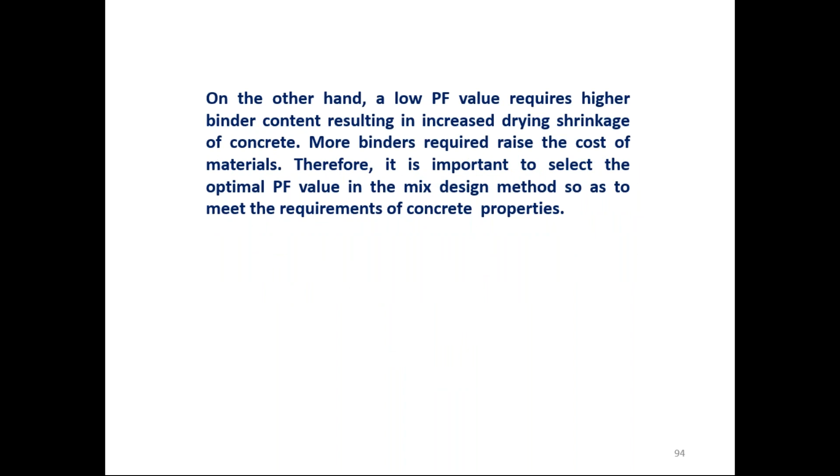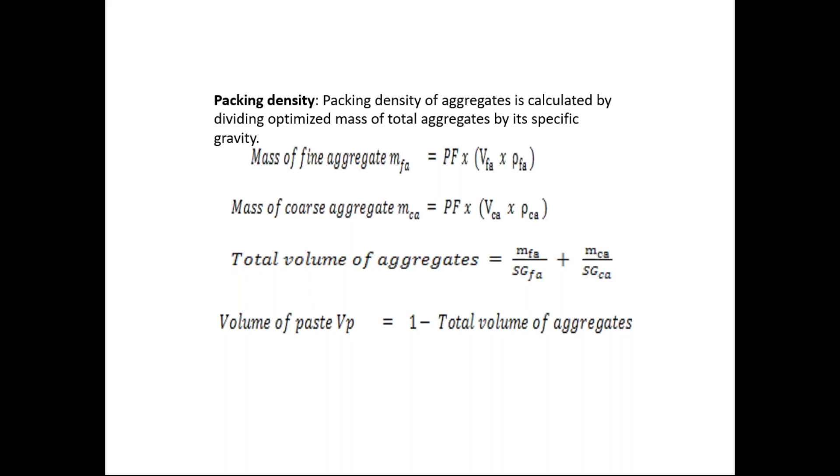So finally, we are interested in finding the volume of paste required once you determine the optimum packing density. Volume of paste determines how much quantity of cement you have to use. Paste is nothing but water plus cement, or if you're using GGBS or fly ash, that too. The volume of paste is 1 minus packing density. So packing density has to be determined by the practical bulk density method, and we can find the volume of paste required.

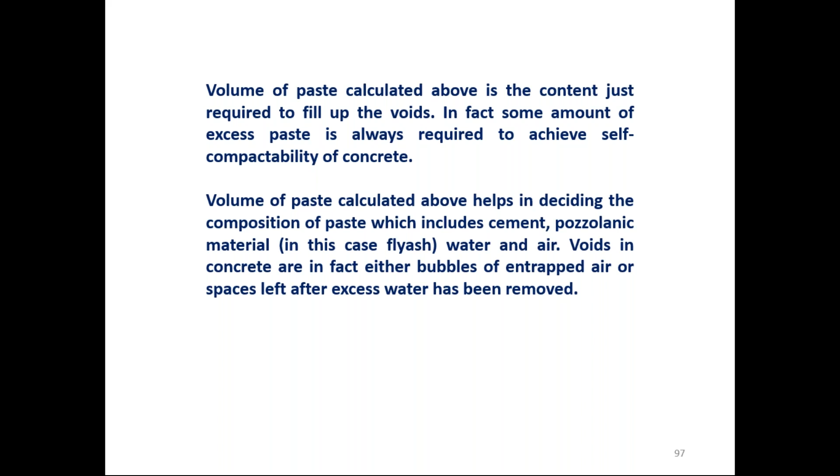The volume of paste calculated above is the content just required to fill up the voids. In fact, some amount of excess paste is always required to achieve self-compactability of concrete. Otherwise, the same paste may be sufficient to get say 40mm slump or 60mm slump, or even for pumping concrete about 100mm slump by adding suitable admixture at required dosages. So you have to increase the paste volume by some amount. This volume of paste helps in deciding the composition of paste, which includes cement, cementitious material like fly ash or GGBS, water and air. Voids in concrete are either bubbles of entrapped air or spaces left after excess water has been removed. This way you can find the various parameters of bulk density and packing density.

So what is the essence of this optimization of aggregates? Packing density of combined aggregate with manufactured sand as fine aggregate is found to be more than with natural river sand, for all the aggregates tested. This indicates that more paste is available for the aggregate combination when manufactured sand is used as fine aggregate, meaning there's better packing density. So when packing density is more, the volume of paste required is less. This means that when fixing the minimum paste content, you are left with more paste volume so that your workability and strength requirements are taken care of.

Aggregates from VSI crushers are found to be superior compared to aggregates from cone and jaw crushers in respect of packing density. This is due to the method of production resulting in well-graded, cubical-shaped aggregates. The packing density for VSI crushers is in the range of about 0.679 to 0.713.

So how do you interpret these figures? Let me explain. 1 cubic meter of concrete is about 1,000 liters. Suppose if we have about 700 liters of aggregates, the remaining 300 liters is the paste content. So now you can determine how much paste content is required, provided you know the packing density.

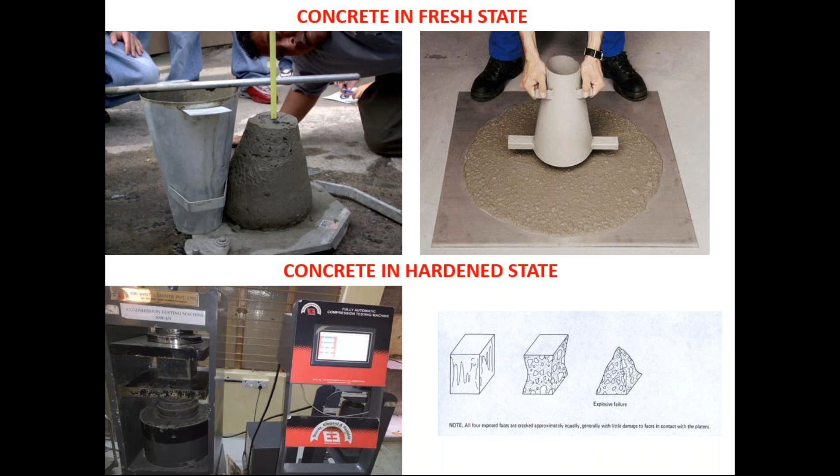Then, if the concrete made is performing very well in the fresh stage, we need to look into its properties in the hardened stage. So we test the concrete in the compression testing machine, and typical failures are shown in the figure, where you should get only vertical or inclined cracks—no horizontal cracks should come if the concrete is cast properly. The very purpose of understanding the packing density or properties of aggregates is to make a concrete which is durable and long-lasting.

So durability tests are also done in the laboratory, which give durable parameters such as water penetration tests, wherein we come to know how dense the concrete is, made using the aggregate packing density or aggregate parameters. This water penetration test is nothing but a water permeability test, wherein we apply a water pressure of about 5 bar continuously for 3 days, 72 hours, and then take the sample and find out the depth of water penetration into the concrete.

Normally, these values are limited by project specifications. Some specifications say it shall not be more than 10 mm, some say not more than 15 mm. MORTH specifies the water penetration value shall be limited to 25 mm. We measure this by splitting the cylinder.

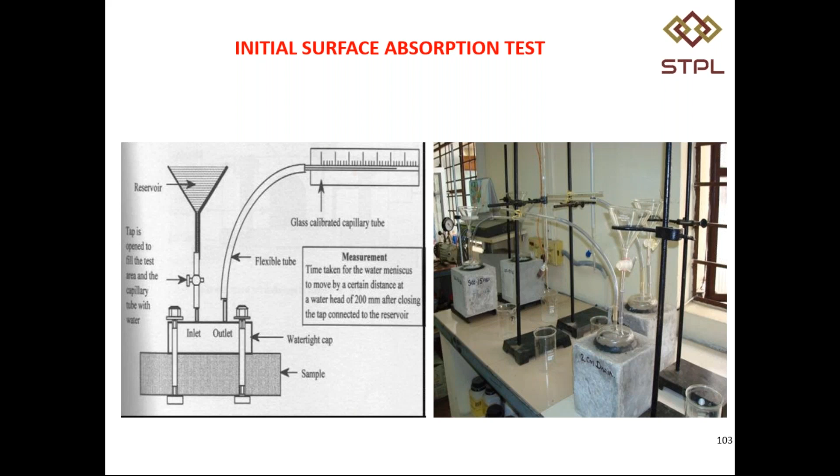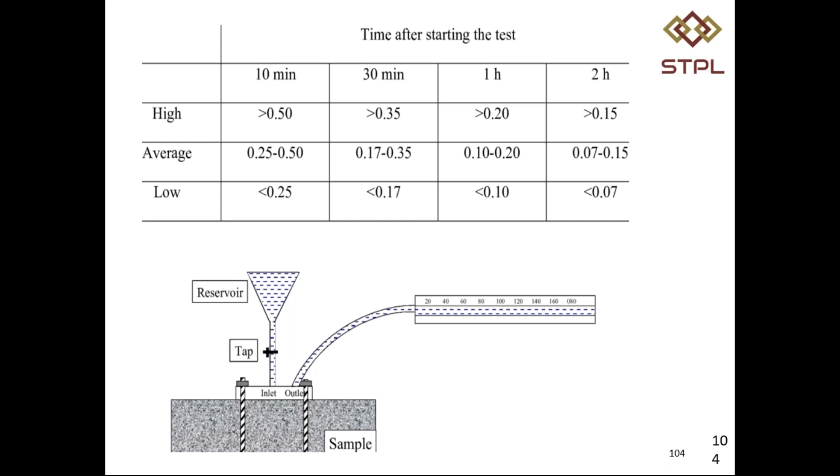Another useful test from the durability point of view is the initial surface absorption test, which gives the surface characteristics of concrete—whether the surface is dense enough, sound enough, and won't absorb much water. So the surface absorption value is found after 10 minutes, 30 minutes, 1 hour, and 2 hours, and the average and low values are specified here. In this presentation, we'll follow 30 minutes. This is a very simple test to know the surface characteristics of concrete.

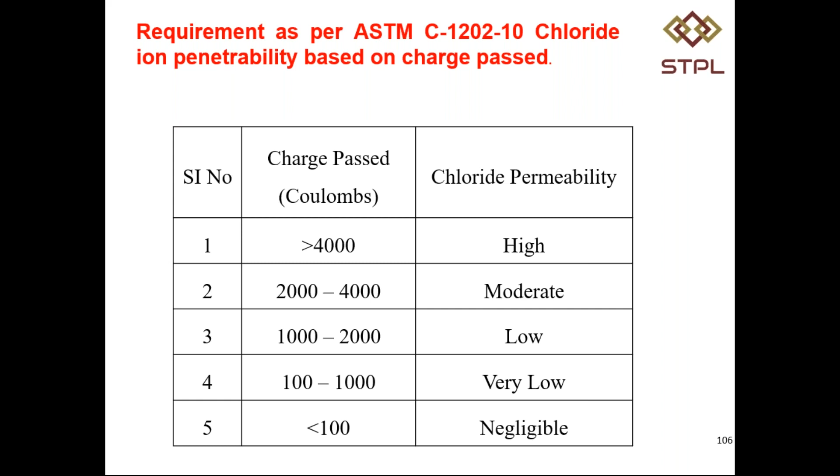Another important test, especially for concrete made in coastal areas, is the rapid chloride penetration test, RCPT. This test is done to check the permeation of chloride ions into concrete—a simple 6-hour test for which we need specific equipment. The table given in ASTM 1202 gives the requirements, and if you have made good concrete with good gradation and quality of aggregates, the permeability values can be as low as 1,000 to 2,000, or maybe less than 1,000 coulombs.

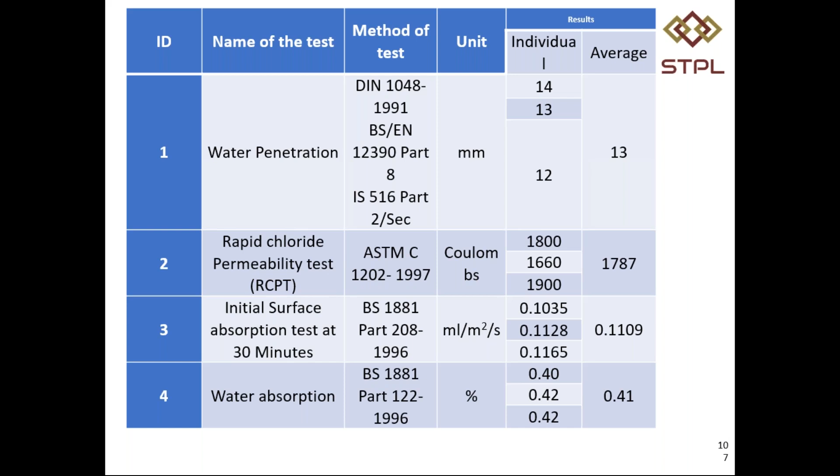So this is the permeability test. These are the typical values for water penetration test, rapid chloride permeability test, initial surface absorption test, and water absorption—another simple test becoming more and more popular. The water absorption value, if the concrete is well compacted and has good gradation of aggregates, can be less than 1%, but normally it won't be so low. In normal concrete, it will be at least around 2% or so. This particular concrete was a high strength, high performance concrete, so we got such very low values. Water absorption is a very useful durability test which we do.

Looking into all these things, the very purpose of studying the properties of aggregates—which affect the properties of concrete in the fresh stage and hardened stage, from the strength point of view or the durability point of view—is to achieve durable concrete meeting requirements in both stages. Aggregates play a very important role. Selection of aggregates and optimizing aggregate content in the total mix is crucial to achieve durable concrete.

This is what I wanted to discuss with you, because all of you professionals must be following aggregate testing on a day-to-day basis in RMC plants, QAQC laboratories, and site laboratories. But importance should be given to gradation of aggregates, blending of aggregates, shape of aggregates, and the source of aggregates—whether it is from a vertical shaft impact crusher or not. Finally, you also need to look into the M-sand, the percentage passing through 75 micron, because this is very, very critical and important—it increases the water demand and cement demand.